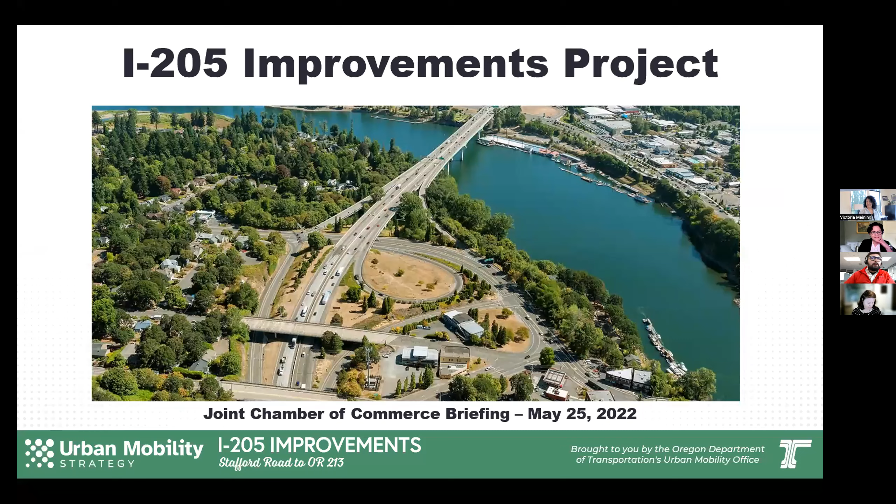Let me know if you can all see my screen. It looks great. Cool. I'm just waiting on April to join in today.

Robert, while we're waiting for April, could you do me a favor? Could you tell me about the difference? I see the I-205 improvements, but then what is the urban mobility strategy?

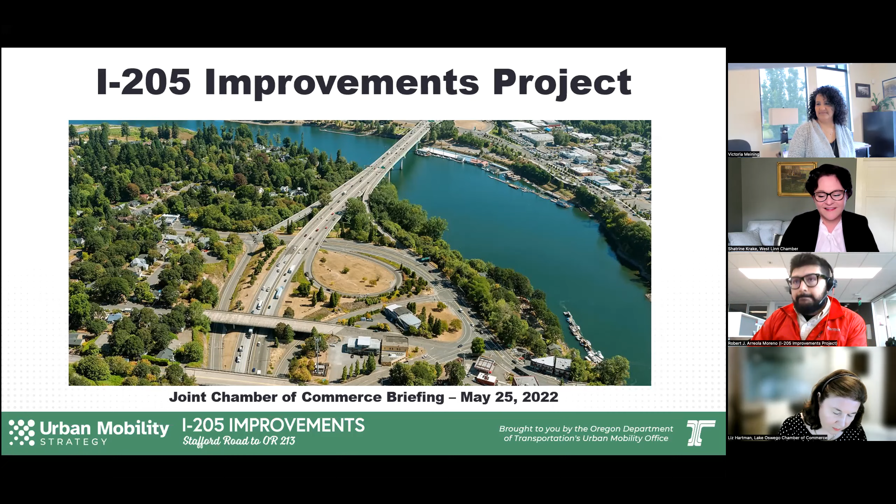Yes, of course, I can get that started. So I can go on to the first slide. The urban mobility strategy map here kind of encompasses part of the overall ODOT program. Today, we're specifically highlighting the I-205 improvement project here. It is overall a broader conversation with multiple supports through different projects, including the Rose Quarter Improvement Project, the Oregon Toll program, and smaller other projects along the 205 and 5 corridor.

Alright, thank you so much. I saw that on there and I wasn't quite sure if it was another sector. So that helps me put everything into perspective, but it's all underneath ODOT. Yes, correct, it would be a subdivision of ODOT. Okay, thank you so much.

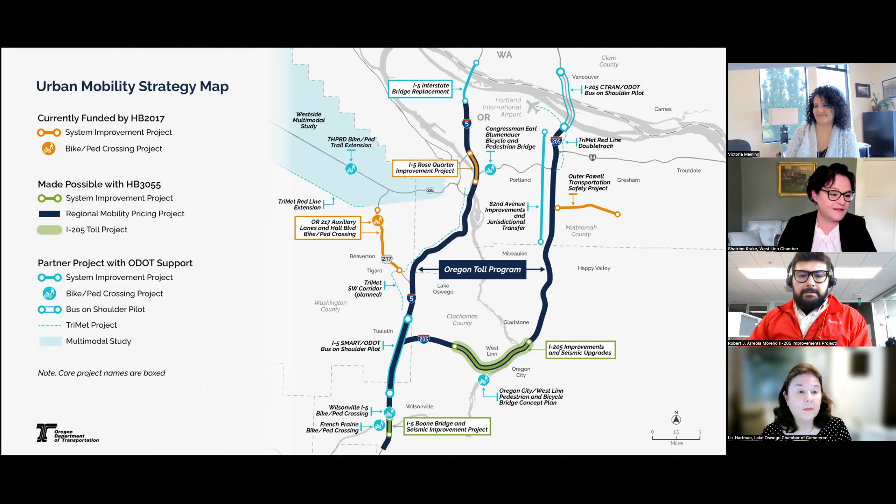And I think I can go on to the next slide. So part of the project needs here, there is about 6 3/4 hours of congestion per day approximately, resulting in 896 crashes throughout the corridor, which also costs us about 10.9 million in costed injuries, property damage, and so forth.

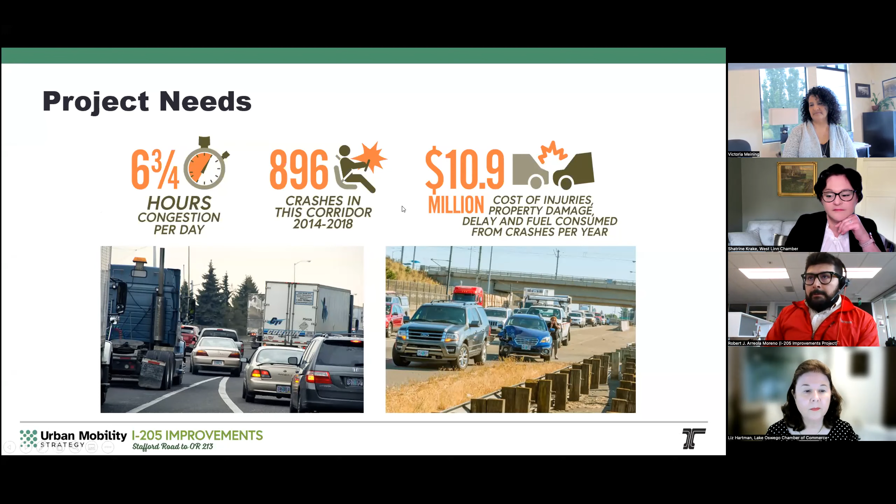Some of the benefits of the project include making sure we strengthen the Abernethy Bridge along with 8 other bridges. This will seismically upgrade our infrastructure to withstand a major earthquake. We are also anticipating this will result in improving our interchanges, including the on and off ramps around Oregon 43 and 99 East, as well as reducing congestion and travel times.

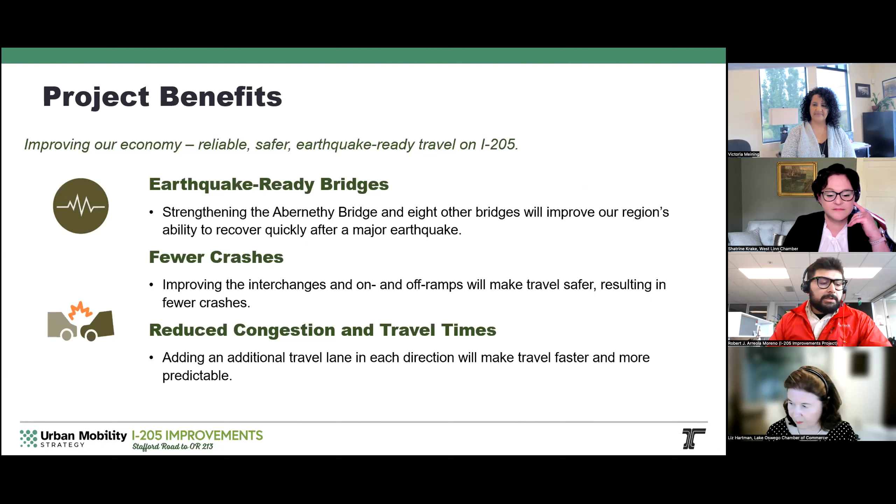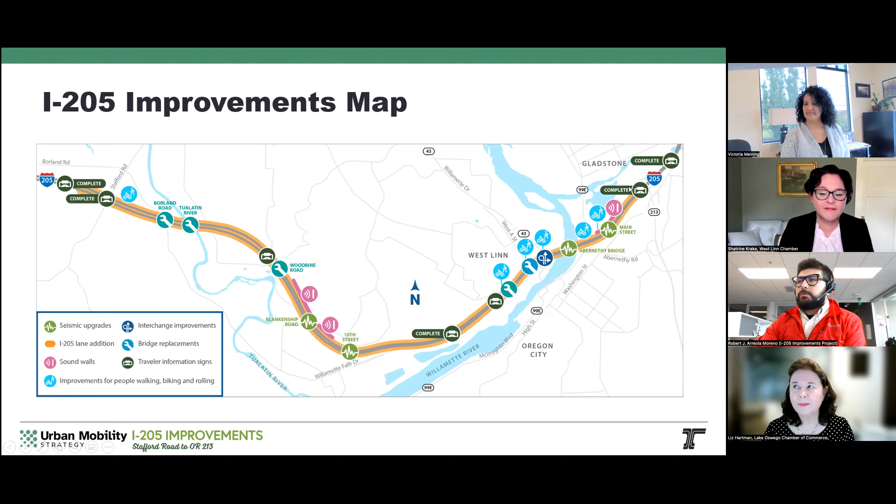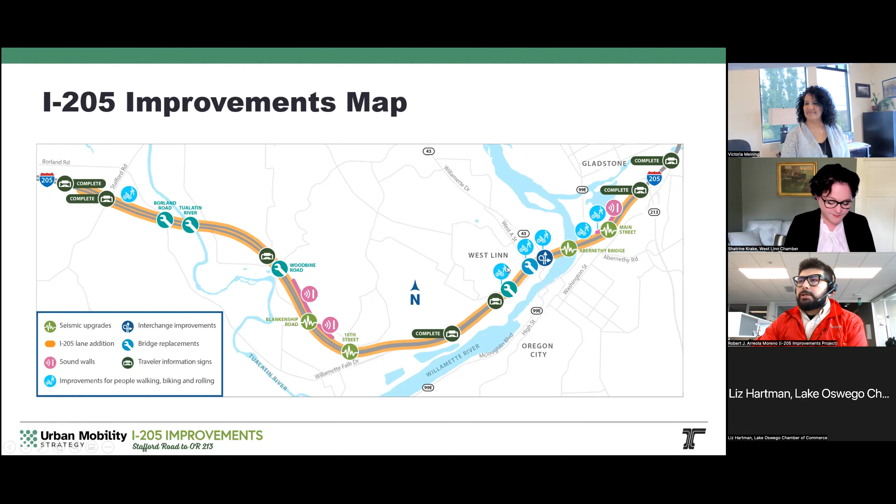This again is a graphic illustrating the I-205 improvements here. As mentioned before, we have 7 traveler informational signs, 5 of them have already been installed, and 2 of them are still pending installation. There will be a couple improvements to some of the bridges along the I-205 between Stafford Road and Oregon 213, specifically around that area. Here we want to focus around the first phase of the project, which leads me to the next slide.

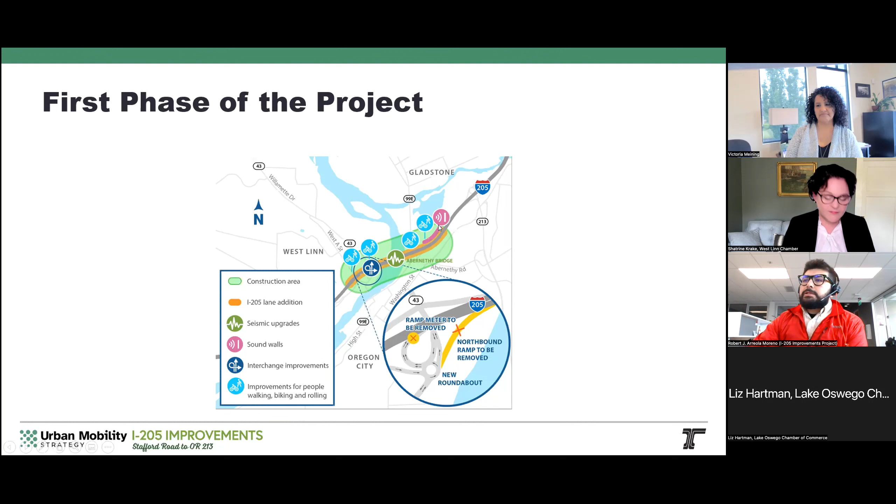Alright, so this is the first phase of the project. We see here in the green area highlighting the first phase of the construction area. There will be an additional lane on each side. We will be seismically upgrading the Abernethy Bridge, as well as installing the sound wall along exit 9 on the southbound direction. There will be interchange improvements by removing the northbound on-ramp here, which will definitely alleviate the congestion on the 205 northbound. Other improvements also include improvements to the walk for people who walk, bike, and roll along Oregon 43 and 99 East.

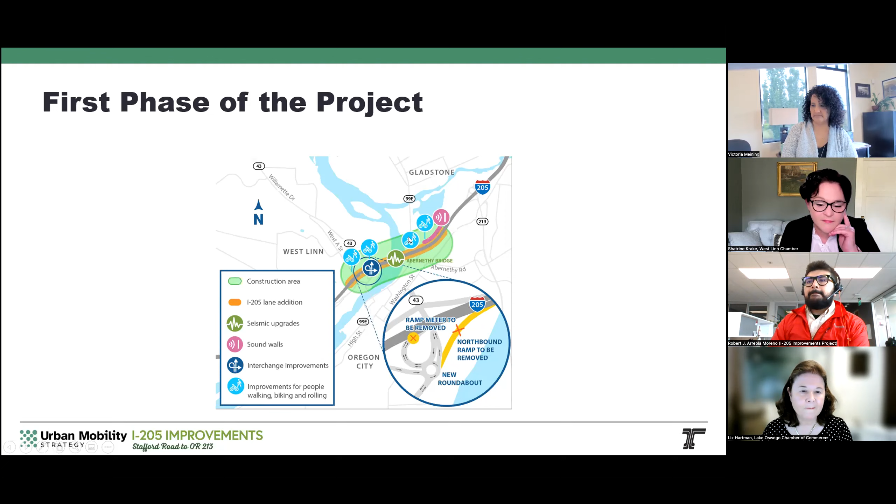And here I want to capture a slide of the Abernethy Bridge. So this will probably take about less than a minute.

So in this process, construction crews will install columns at both ends of the current columns and extend the girder. While doing so, they will also expand the wingspan of the bridge on both sides, bringing in equipment to roll the bridge 8 feet on each side. Then they will install the wingspans, which will accommodate a lane on each side of the bridge. This is part of the Abernethy Bridge slide.

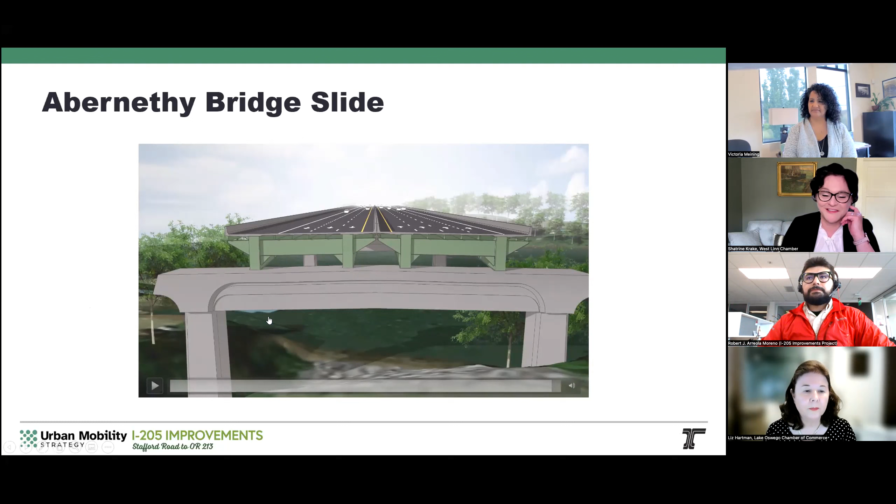Here again is a graphic depicting the work bridge and site access for the Abernethy Bridge. This is a view from the southbound area, showing the southbound going across and the northbound on the other side of the bridge. McLean House would probably be on the left side of this graphic, whereas Jon Storm Park would be on the other side of the river, with Best Western Motel in the background.

This is some of the work anticipated in the first year or so during construction. The staging work is anticipated this summer, June 2022.

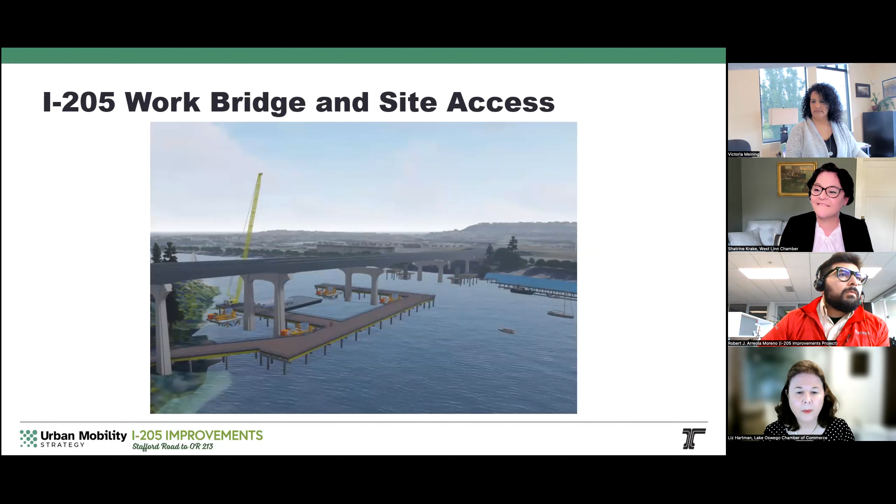We do have a question. They were wondering specifically where the parking lot is closed—is it the whole parking lot or just a portion of it? Currently we're working with the contractor, and I think April found the link and she's able to join in too, who can help also address this question.

And she is here. Hey, y'all, can you hear me? Yay, yay! I'm so sorry, oh my goodness, it's just been like a nail biter the past 15 minutes. Join as a panel. There we go. Okay.

Hi April, we received a question about the specifics with the closure on Jon Storm Park parking lot. Yeah, the whole parking lot will be closed. That area will be kind of busy, so it's safer to just close the parking lot, and it will reopen when phase 1 construction is completed.

We're looking, like when I had seen the project plan, is it hoping to be 2025 for phase 1, or is there a different timeline? For phase 1, 2025. For the whole project, we're looking at 2027. Is that the projected date? Okay, thank you, projected year.

This is a good rendering of what the public will see, this particular work bridge and site access. It's important to note that most of the early work is going to be in the water, so we won't see a lot of impacts in the area, but there will be some, and we want to be mindful of the folks that use those areas. We want to make sure folks are signed up for email and text alerts so we can get those messages out to the community.

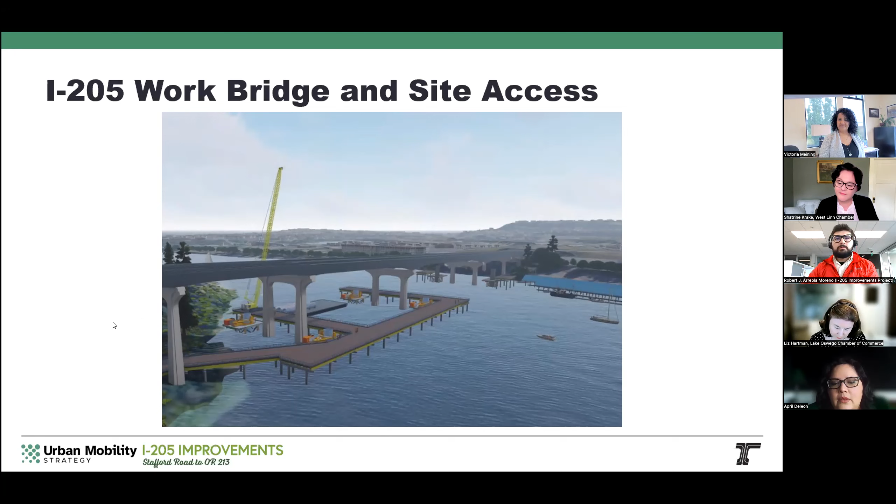Early on we will have a single lane closure of Clackamas. I think there's going to be something on the West Linn side as well, but I can't recall just yet—it might be on another slide. Robert, did I miss anything on this one?

So we are looking at this year some nighttime single lane closures. It looks like what we're going to see early is Clackamas Drive under the Abernethy Bridge, and then that parking lot closure. The timing on the other closures and impacts is still being scheduled, so we're not going to see specifics quite yet, but we will have that released very soon, because our contractor's contracts and agreements are being executed today. So hopefully they can really hit the ground running, give us their schedules and information that we can then send out to the public. My apologies, we're not quite there yet on understanding fully when these impacts will occur.

Overall, we definitely want to make sure the message is that there will be minor impacts this year. Bigger impacts will come in 2023 and 2024, with mainline closures like highway closures, ramp closures, and single lane closures during daytime work. We'll want to shout that from the rooftops when we get to that point. Did I miss anything here, Robert?

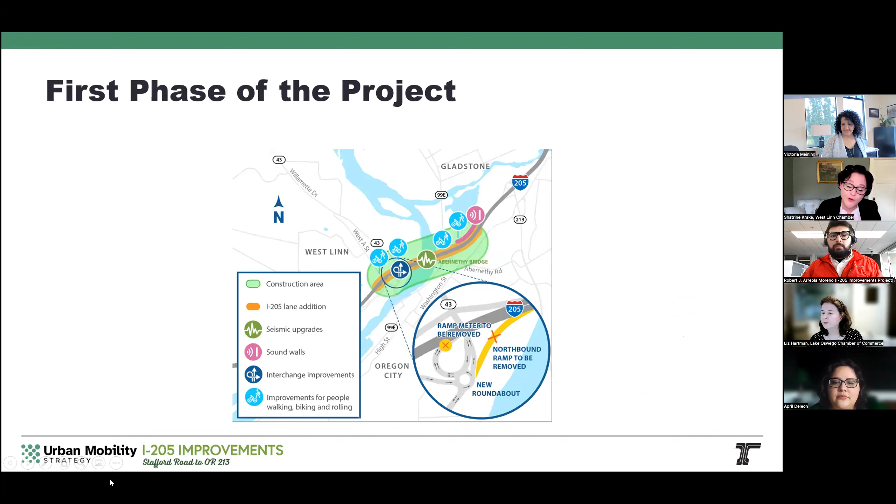So do you see the northbound ramp to be removed? This is the one they're talking about. If we widen Abernethy, is there a need to remove that? And what would that benefit? Have you heard any of the reasoning behind that?

I know that ramp presents safety issues because of the really short opportunity to accelerate and merge. And so the roundabout is really about safety in the area, because there's so much traffic coming in and merging at that spot, the roundabout was analyzed to be a safer option for this particular part of the interchange.

So I do know there were definitely some safety reasons behind getting that roundabout in there. I can check with the technical team if there are other notes we want to make about this in particular and why that northbound ramp is going to be removed. Happy to share that. Thank you.

I do understand, yeah, it is a short bit for everybody to move in and out. So would we be correct to say the way you get on northbound would be where it says ramp meter to be removed? Is that where everybody would be getting on for northbound in the future? So you've lost the one, but then everyone would be getting on, so you have that longer merge time. Is that correct? Yes, that's the area where individuals will be getting on, into 205. All right, so it just gives you some more leeway time to move.

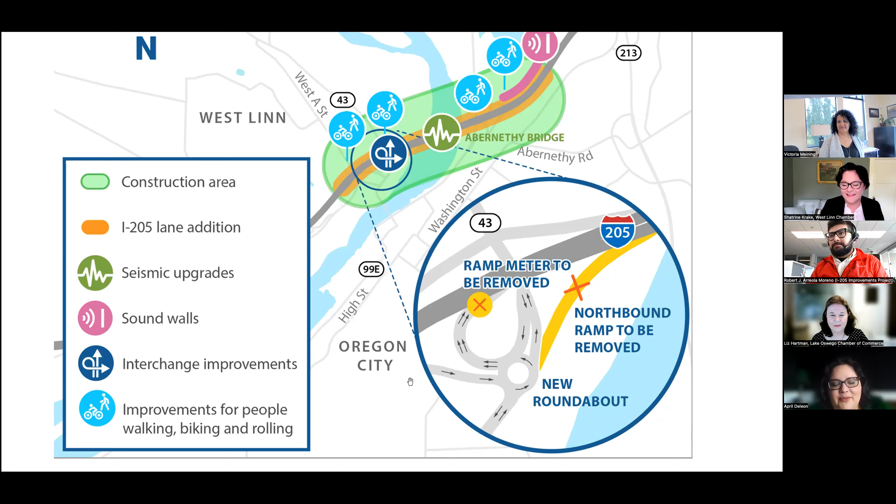Sorry to make us go backwards. Okay, forward we go, no worries. You want to go ahead and go to the slide we left off on? Also, thank you for enlarging that, Robert, that was great.

Okay, yeah, so here's the schedule. We're looking at construction through 2025 for this first phase. The other phases are really being evaluated to determine when they'll start, so just stay tuned for that information as well.

It's about making sure that we're piecing out the work appropriately, and we're creating the specs to ensure that we're providing opportunity for the Disadvantaged Business Enterprise Program for those certified as disadvantaged business enterprises. We are also making sure that we refine the specs for the workforce opportunities that are available on the project as well.

I don't know if Robert had mentioned it, we're using a pilot program from the Federal Highway Administration. We're the first to do this in Oregon. I don't know what number we are nationwide, but it's a new program where we are able to prioritize hiring from distressed zip codes.

And so those have been identified in all four nearby counties. So we've got Clackamas, Multnomah. What's that one in Salem, Robert? Marion? Marion County, yes, Marion County, and then Washington County.